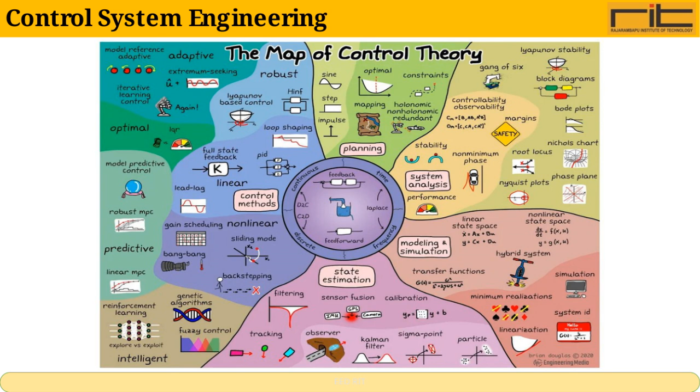On this slide, we're focusing on control system engineering, which is a crucial field in engineering that deals with designing and managing systems to behave in a desired manner. Essentially, control systems help us automate processes and maintain stability in various applications, from simple household appliances to complex industrial machinery. By understanding control system engineering, we can improve efficiency, accuracy, and safety across many technologies. This foundation will be important as we dive deeper into the principles and applications throughout the presentation.

By the end of this course, students will have achieved several important outcomes. First, they will be able to represent physical systems using mathematical models, which is fundamental for analyzing and designing control systems. They will also learn how to calculate time domain specifications for second-order systems, giving them insight into system performance like stability and response time. Additionally, students will be skilled in analyzing different systems through both time and frequency domain tools and techniques, enabling a comprehensive understanding of system behavior.

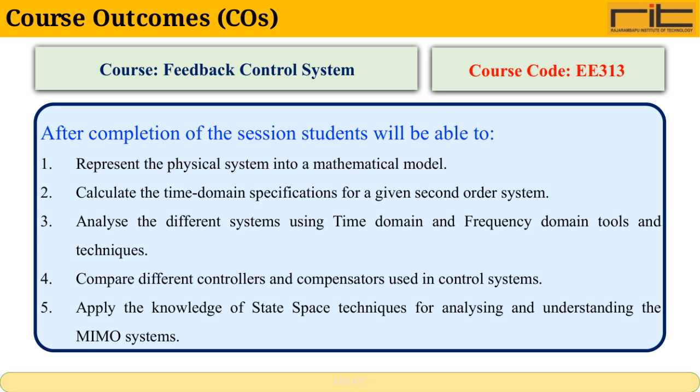In this topic, we dive into the concept of stability, which is crucial for understanding how systems behave over time. We'll explore how the location of poles and zeros in a system affects its stability, and introduce the Routh Hurwitz criterion as a method to determine stability systematically. Additionally, we'll use the root locus method to analyze gain margin, phase margin, and overall system stability through practical examples.

By the end of this topic, you'll be able to explain the time response characteristics of both first and second order systems. You'll learn how to determine the steady-state error for different system types and understand how this relates to overall system performance. We'll also cover how to compute key time domain specifications like rise time, settling time, peak time, and overshoot, which are essential for characterizing second-order systems.

Furthermore, you'll be equipped to evaluate how changes in system parameters affect the responses of both open-loop and closed-loop systems, helping you assess system sensitivity. Finally, we'll analyze the crucial role of feedback in influencing system stability, improving response, and enhancing disturbance rejection. This comprehensive understanding will give you a solid foundation to analyze and design stable, responsive control systems.

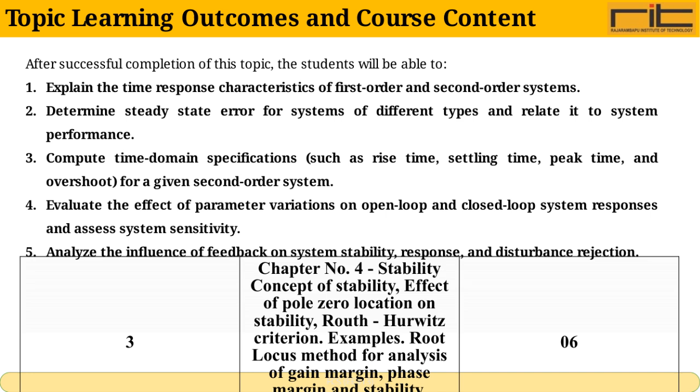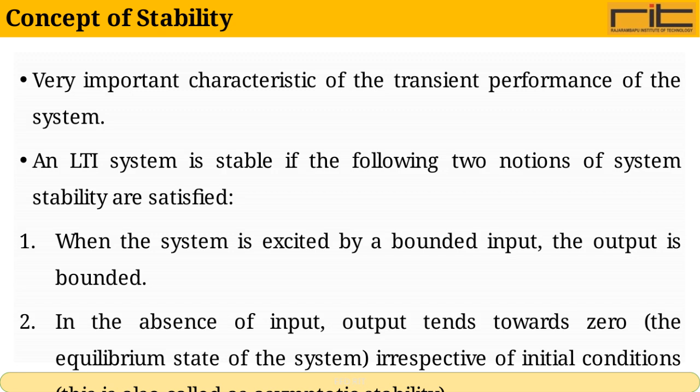When we talk about the concept of stability in an LTI system, it's crucial to understand two key ideas. First, the system is considered stable if, whenever it receives a bounded input, its output remains bounded as well. This means the system doesn't produce unbounded or runaway responses when given reasonable inputs. Second, in the absence of any input, the output should naturally settle down toward zero. This point is called the equilibrium state. This behavior, where the output returns to zero regardless of where it started, is known as asymptotic stability. Together, these conditions define what we call BIBO, or bounded input bounded output stability, which is a very important measure of how well the system performs in response to inputs over time.

When we talk about stability in a system, what we mean is whether the output remains controlled over time. Simply put, if the output stays within a certain range and doesn't spiral out of control, the system is considered stable. This is usually defined as producing a bounded output when given a bounded input. If the output goes beyond control, the system is labeled unstable.

Now, based on how systems behave in terms of stability, we can classify them into three categories. First, an absolutely stable system, which means it remains stable under all conditions. Then, we have conditionally stable systems, where the system's stability depends on certain parameters or conditions being met. Lastly, there are marginally stable systems, which are right on the edge, neither moving toward stability nor instability, often oscillating without growing unbounded.

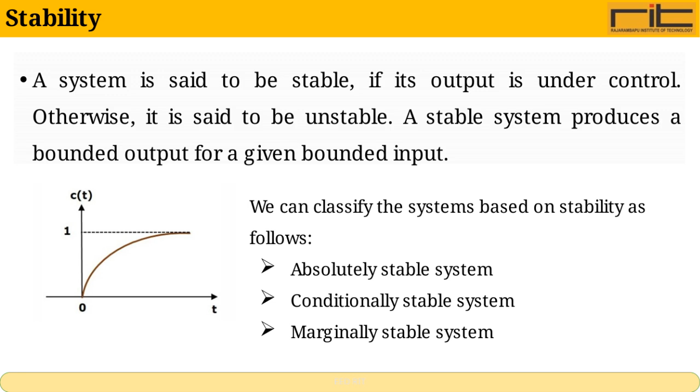Understanding these classifications helps us predict and control system behavior more effectively. When we talk about an absolutely stable system, we mean a system that remains stable for every possible value of its components. For an open-loop control system, this absolute stability occurs if all the poles of its transfer function are located in the left half of the S-plane.

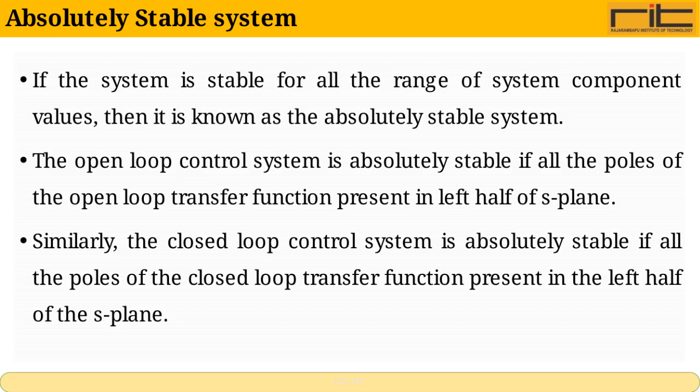This essentially means the system's response will not grow uncontrollably over time. The same principle applies to closed-loop control systems. Their absolute stability requires all poles of the closed-loop transfer function to also be in the left half of the S-plane. This ensures that the system will behave predictably and return to equilibrium after any disturbance, regardless of parameter variations. So, in essence, the position of these poles in the S-plane is a key indicator of absolute stability in any control system.

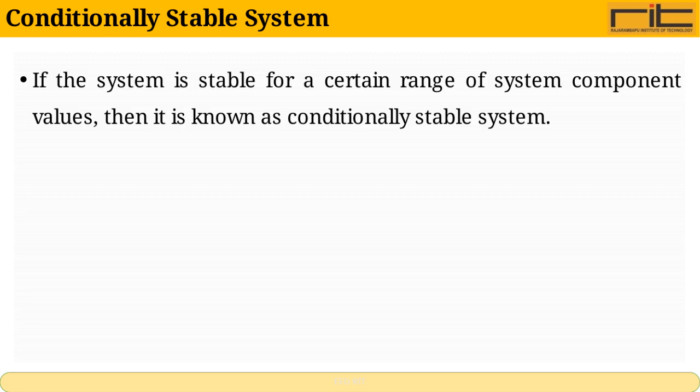A conditionally stable system is one that remains stable only within a specific range of its component values. In other words, the system's stability depends on certain parameters staying within particular limits. If these values change beyond that range, the system may become unstable. Understanding this concept is crucial because it helps us design systems that perform reliably under varied conditions, ensuring safety and functionality. So, when we talk about a conditionally stable system, we're acknowledging that stability isn't absolute but depends on maintaining the right conditions.

A marginally stable system is one that produces an output signal with a constant amplitude and constant frequency of oscillations when given a bounded input. This means the system neither diverges nor settles to zero, but continues to oscillate steadily. In terms of the system poles, for an open-loop control system to be marginally stable, at least two poles of its open-loop transfer function must lie exactly on the imaginary axis of the complex plane.

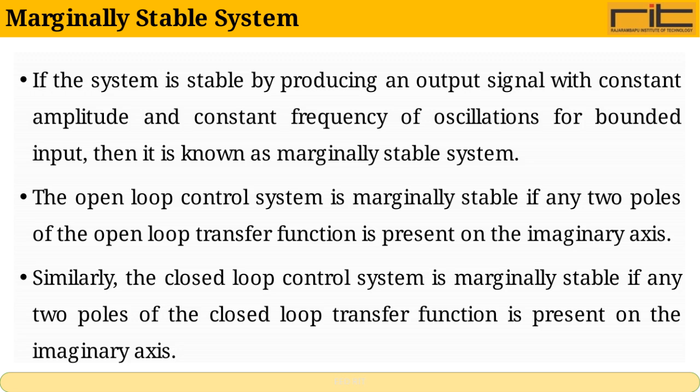Similarly, for a closed-loop control system, marginal stability occurs when two poles of its closed-loop transfer function are located on the imaginary axis. This positioning of poles indicates that the system is on the edge between stability and instability, where oscillations don't die out but also don't grow uncontrollably. Understanding this concept is crucial for analyzing system behavior and designing controls that avoid unwanted oscillations.

When we talk about stability in a system, it all comes down to the roots of the characteristic equation. If every root has a negative real part, the system is stable, meaning it will respond predictably and settle over time. On the other hand, if even one root has a positive real part or if there's a repeated root on the imaginary axis, what we call the jω axis, the system becomes unstable, which means it could grow unbounded or behave erratically. Then there's the case of marginal stability, where all roots have negative real parts except for one or more non-repeated roots exactly on the jω axis. Here, the system neither grows nor decays, but maintains a steady oscillation. Understanding these root conditions is crucial for predicting and controlling system behavior.

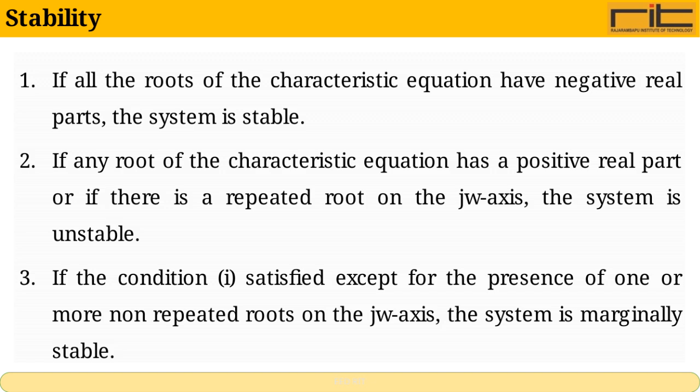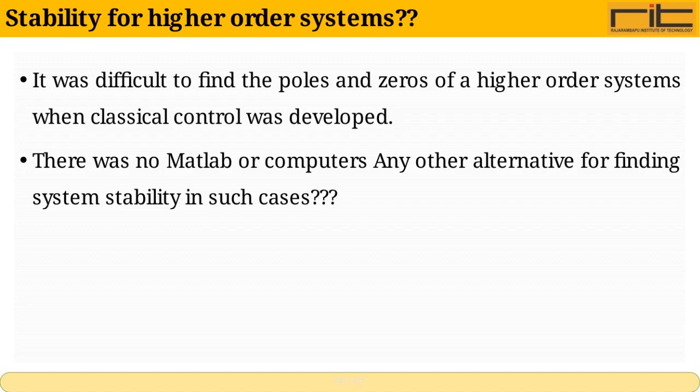When classical control methods were first developed, determining the poles and zeros of higher-order systems was quite challenging. This was mainly because there were no tools like MATLAB or other computer software to assist in these calculations. Without these tools, engineers had to rely on complex mathematical techniques, which could be time-consuming and prone to errors. So, the question arises, how did they check system stability under these circumstances? Was there an alternative method available to analyze stability without explicitly finding all poles and zeros? This sets the stage for exploring stability analysis techniques suited for higher-order systems, especially before the advent of modern computational tools. Let's talk about the Routh stability criterion.

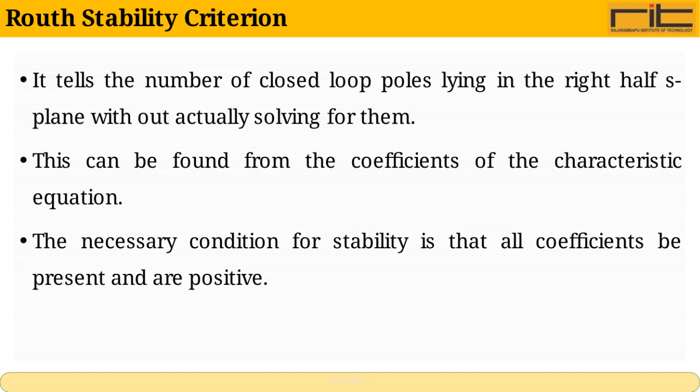This criterion allows us to determine the number of closed-loop poles that lie in the right half of the S-plane without having to solve for the poles explicitly. Essentially, it gives us a way to assess system stability by examining the characteristic equation's coefficients. A key point here is that for a system to be stable, all the coefficients of the characteristic equation must be present and must be positive. If any coefficients are 0 or negative, it indicates the presence of poles in the right half plane, which means the system is unstable. This method is particularly useful because it simplifies the stability analysis significantly.

The Routh-Hurwitz stability criterion involves two key conditions, a necessary condition and a sufficient condition for stability. First, the necessary condition must be met for the control system to even be considered stable. If this condition is not satisfied, we can confidently say that the system is unstable. However, meeting the necessary condition alone doesn't guarantee stability, it just means the system might be stable. This is where the sufficient condition comes into play.

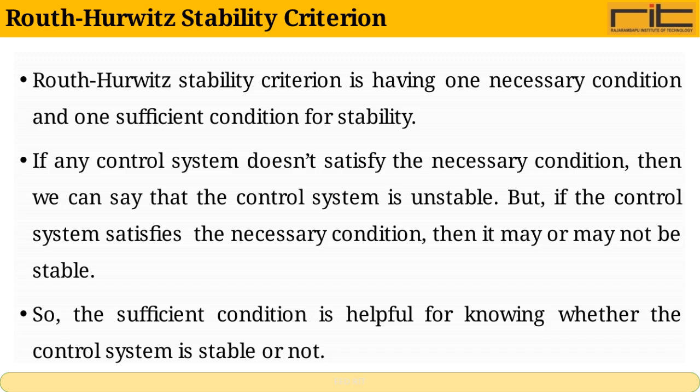It helps us determine definitively whether the control system is stable or not. So, to fully assess stability, both conditions play crucial roles, with the sufficient condition providing that final confirmation.

Now, let's discuss the necessary condition for Routh Hurwitz stability. For the system to be stable, a key requirement is that all the coefficients in the characteristic polynomial must be positive. This condition ensures that all the roots, or the poles, of the characteristic equation have negative real parts, which is crucial for system stability.

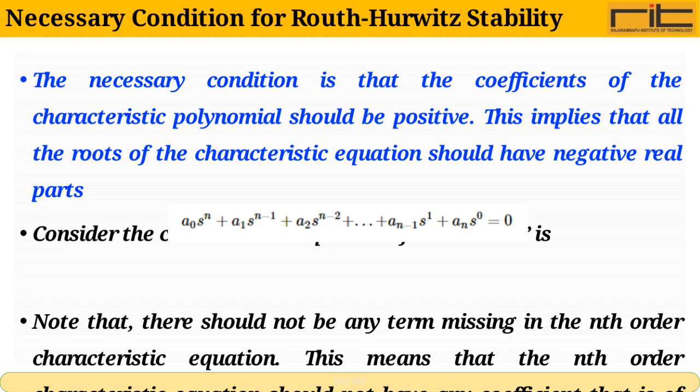It's important to remember that the characteristic equation should be of order n, and importantly, no term should be missing in this equation. That means none of the coefficients can be zero. If any coefficient is zero or negative, the system cannot be stable according to this condition. So, in summary, positivity of all coefficients in the characteristic polynomial is a necessary condition for the system to be stable, linking directly to the location of the roots in the left half of the complex plane.

Now let's focus on the sufficient condition for Routh Hurwitz stability. The key point here is that every element in the first column of the Routh array must have the same sign. In other words, all these elements should be either positive or all negative. This uniformity in sign indicates that the system is stable according to the Routh Hurwitz criterion. If the signs differ, the system will have poles in the right half of the complex plane, leading to instability. So, maintaining the same sign across the first column is essential for ensuring system stability.

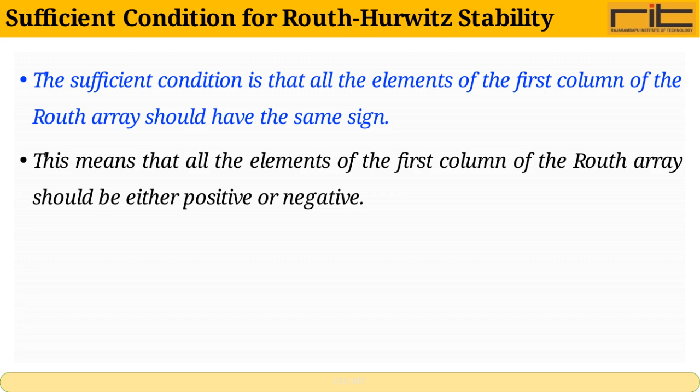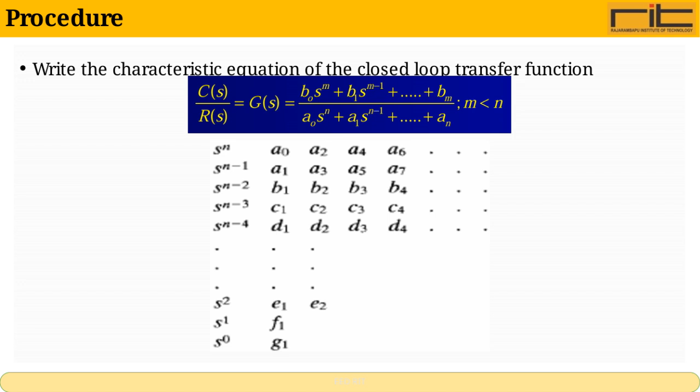Now, let's focus on an important step in analyzing control systems, writing the characteristic equation of the closed-loop transfer function. This equation is crucial because it helps us determine the stability and dynamic behavior of the system. Essentially, the characteristic equation comes from the denominator of the closed-loop transfer function when set equal to 0. By solving this equation, we can find the system poles, which tell us if the system will behave as desired or if it might become unstable. Understanding this procedure is key before moving forward with any design or analysis, so keep this in mind as we continue.

Now, let's focus on evaluating the b's in this procedure. It's important to note that these b's are different from those in the transfer function we might have seen earlier. We continue evaluating the b's until all the remaining values are 0, ensuring we've captured all necessary coefficients. The key method here is cross-multiplying the coefficients from the previous two rows to find the new b's. Once determined, we update the array with these new values.

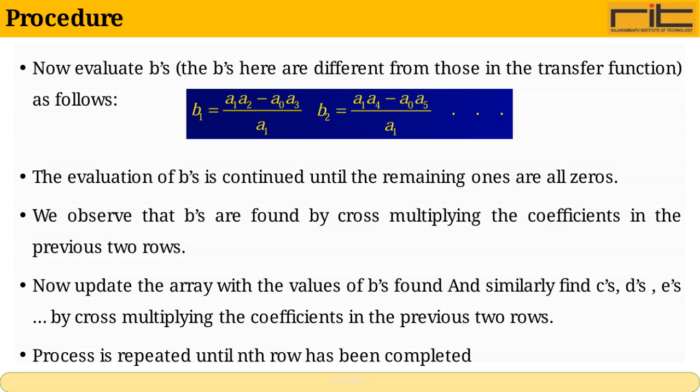We then use the same approach to find the next set of coefficients, the c's, d's, e's, and so on, always cross-multiplying the coefficients from the two preceding rows. This process is repeated systematically until the nth row of the array is fully completed. This step-by-step cross-multiplication and updating ensures that all necessary coefficients are accurately calculated for the analysis at hand.

Here, we're looking at an illustration of the procedure. This visual representation helps us understand the step-by-step process clearly. As we go through this, focus on how each step connects to the next, ensuring a smooth flow. The key takeaway is to grasp the sequence and how each part contributes to the overall operation. This understanding is crucial for applying the procedure effectively in practical scenarios.

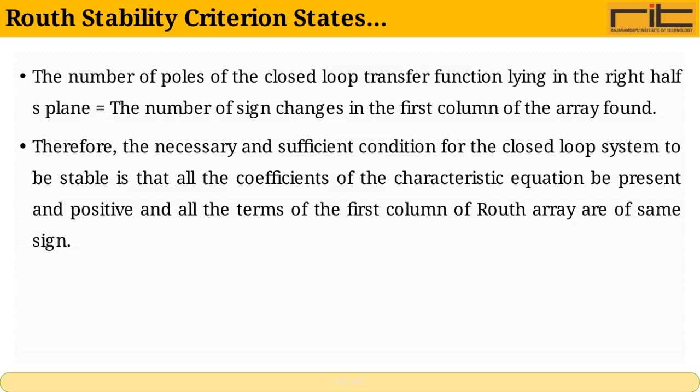The Routh stability criterion tells us that the number of poles of the closed-loop transfer function in the right half of the S-plane equals the number of sign changes in the first column of the Routh array. This is crucial because it directly indicates system stability. Simply put, for the closed-loop system to be stable, all coefficients of the characteristic equation must be present and positive. Additionally, every term in the first column of the Routh array must have the same sign. If this condition is satisfied, we can confidently say the system is stable. This criterion provides a straightforward way to assess stability without explicitly calculating the roots of the characteristic equation.

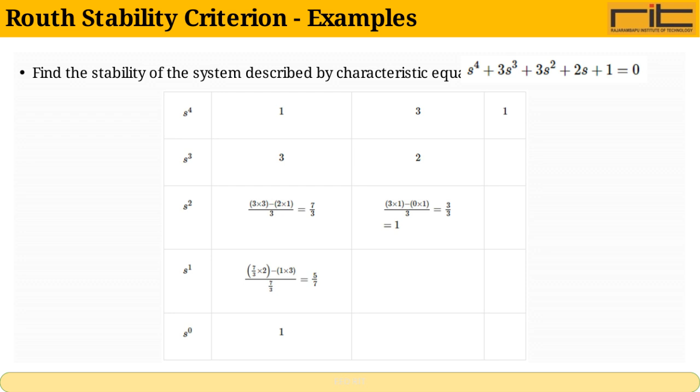On this slide, we're focusing on applying the Routh stability criterion to determine the stability of a system characterized by its characteristic equation. The key idea here is to use the Routh array, a systematic method that helps us examine the number of roots with positive real parts without actually solving for them. By constructing this array and analyzing the sign changes in the first column, we can quickly assess whether the system is stable. This example will walk us through that process step by step, illustrating how the criterion can provide a clear and efficient way to check system stability.

We'll walk through the process of constructing the Routh array and analyze the signs of the first column to conclude the system's stability. This approach is particularly useful because it allows us to assess stability without explicitly calculating the roots, saving time and effort especially for higher-order polynomials.

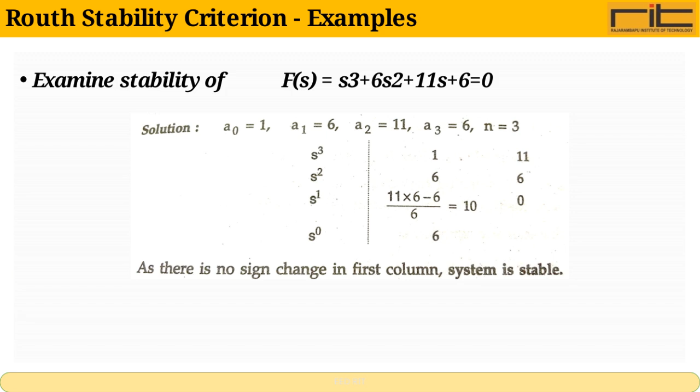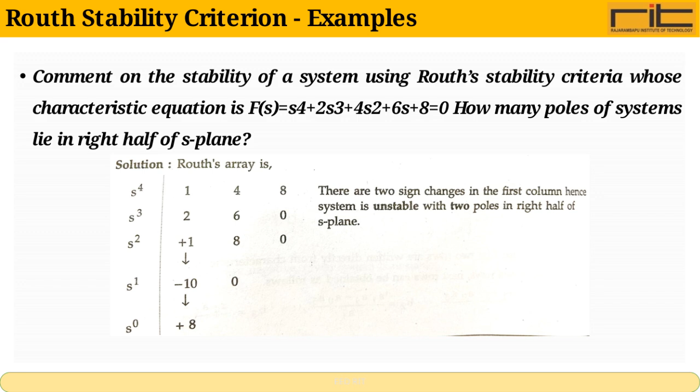Using Routh's criterion, we build the Routh array from the coefficients of the characteristic equation. If any sign changes occur in the first column of this array, it means there are poles in the right half-plane and the system is unstable. By carefully evaluating this equation, we check for the number of sign changes. This method provides a straightforward way to assess stability without explicitly solving for the roots, making it a powerful tool

for control system analysis. Now, let's talk about the two special cases that can occur when constructing the Routh array. The first special case happens when the very first element of any row in the Routh array is 0. This can create complications because we can't proceed with the usual calculations for the next row without adjusting for this 0 element.

The second special case occurs when all the elements in a particular row are 0. This situation indicates the presence of symmetrical roots or repeated roots, and it requires a different method to move forward in the stability analysis. Both of these cases need to be handled carefully to correctly determine the system's stability using

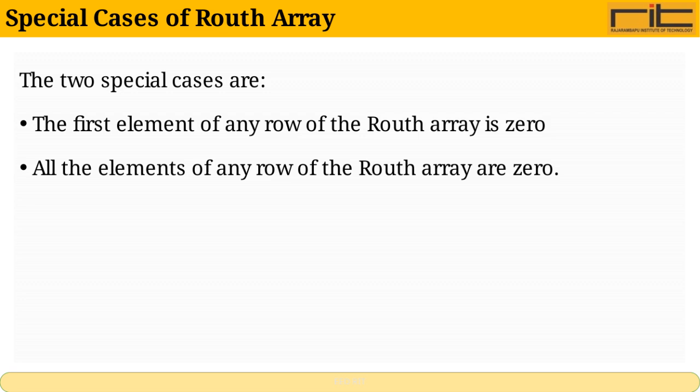the Routh criterion. Now let's take a closer look at some special cases that can arise when constructing the Routh array. These cases are important because they require us to adapt our standard procedure to correctly determine system stability. One common special case occurs when a row in the Routh array consists entirely of zeros, which indicates the presence of symmetric roots or repeated roots on the imaginary axis.

Another special case happens when the first element of a row is 0 but the row is not entirely 0. In this situation, we typically replace that 0 with a small positive number, often denoted as epsilon, to proceed with the analysis. Understanding how to handle these special cases is crucial for accurately assessing the stability of control systems using

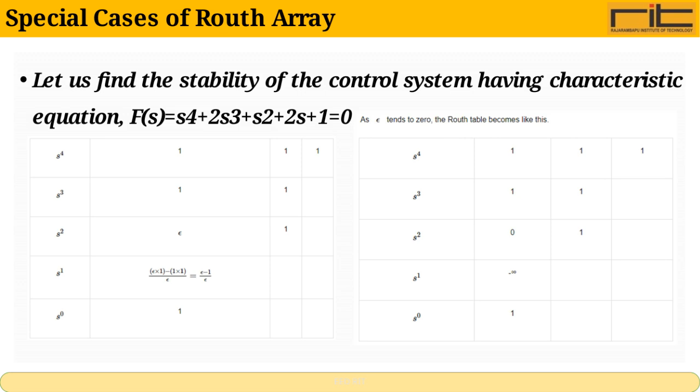Understanding these special cases in the Routh array is crucial because they help us identify scenarios where standard stability tests might fail or require additional steps, such as the presence of 0 entries in the array or special patterns that could indicate marginal stability. I'll guide you through how to approach these cases and ensure accurate stability analysis.

Identifying poles in the right half-plane is critical because it indicates system instability. In cases like this with higher-order polynomials, the Routh array helps us determine stability without explicitly calculating the roots. By constructing the Routh array and examining sign changes in the first column, we can find the number of roots with positive real parts, thus telling us how many poles are in the right half-plane. This approach saves time and provides essential insights into system behavior.

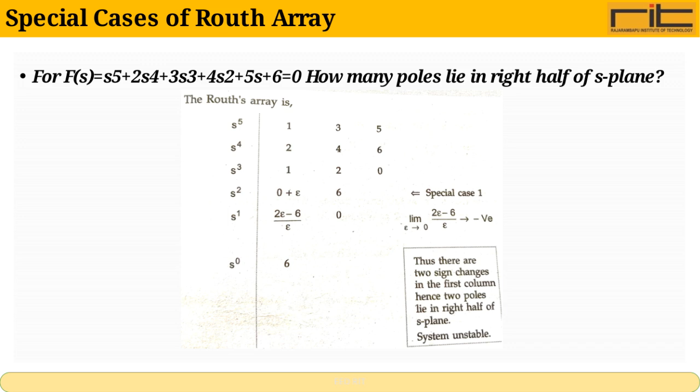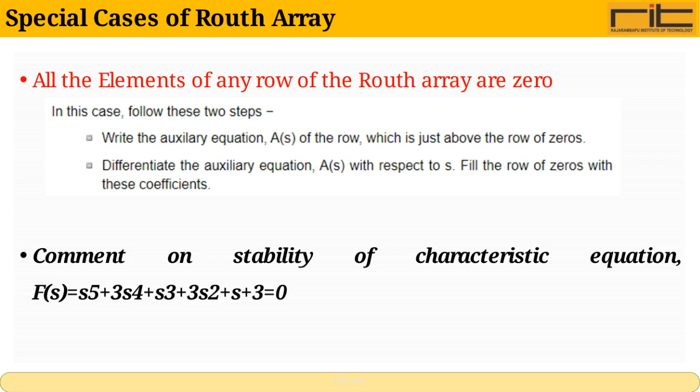In such a case, the standard Routh criterion doesn't directly apply, and additional methods, such as forming an auxiliary polynomial from the row above and examining its roots, are used to determine the stability of the system. This special case requires careful handling to accurately evaluate the system's behavior.

Here, we're looking at a special case in the Routh array where the characteristic equation is given as s to the fifth plus 3s to the fourth plus s cubed plus 3s squared plus s plus 3 equals 0. When we form the Routh array from this polynomial, we observe two sign changes in the first column.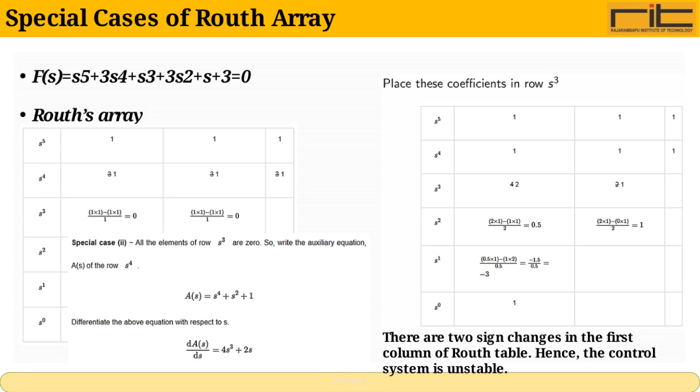This is a critical point because the number of sign changes tells us about the stability of the system. Specifically, two sign changes indicate that the system has two roots with positive real parts, meaning the system is unstable. So, despite the complexity of the equation, this sign change criterion gives us a straightforward way to assess stability quickly and effectively.

The stability of the system depends on the location of the roots of this polynomial in the complex plane. If all roots have negative real parts, the system is stable. Otherwise, it could be unstable or marginally stable.

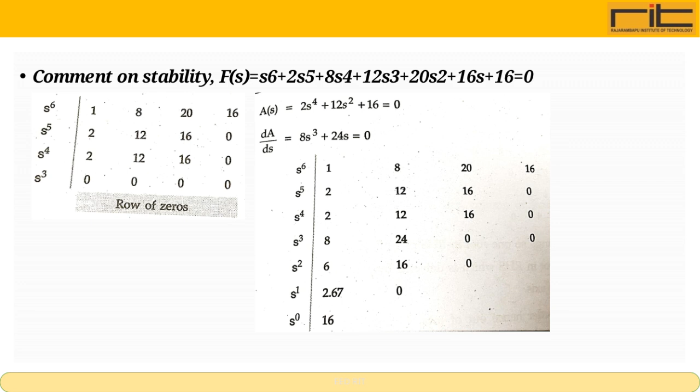Our goal is to comment on the stability by examining the coefficients and possibly applying methods like the Routh Hurwitz criterion or other stability tests to determine if any roots lie in the right half of the S-plane. This analysis is crucial because it tells us whether the system's response will settle down over time or grow uncontrollably.

Let's take a closer look at the stability of the system described by the characteristic equation F(s) equals s to the power of 6 plus 2s to the power of 5 plus 8s to the power of 4 plus 12s cubed plus 20s squared plus 16s plus 16 equals 0.

Stability in control systems depends on the location of the roots of this polynomial. For the system to be stable, all roots must lie in the left half of the complex plane, meaning they must have negative real parts. By analyzing the 6th-degree polynomial, we aim to determine whether this condition is satisfied.

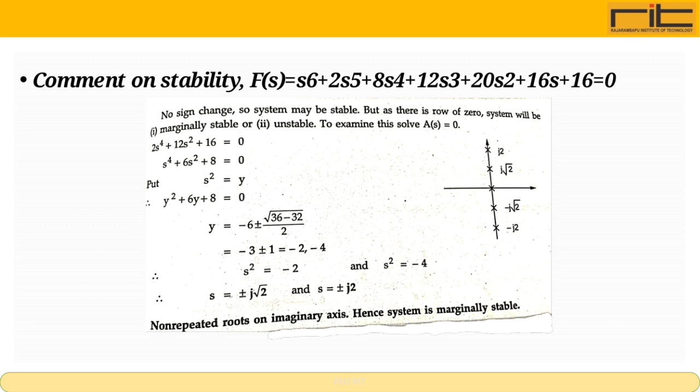Various methods, such as the Routh Hurwitz criterion, can be used to assess stability without explicitly finding the roots. It's important to look for any sign changes or patterns in the coefficients that could indicate poles in the right half plane, which would signal instability. So, the focus here is on understanding whether the system's behavior will remain steady over time or if it might oscillate or diverge due to unstable poles.

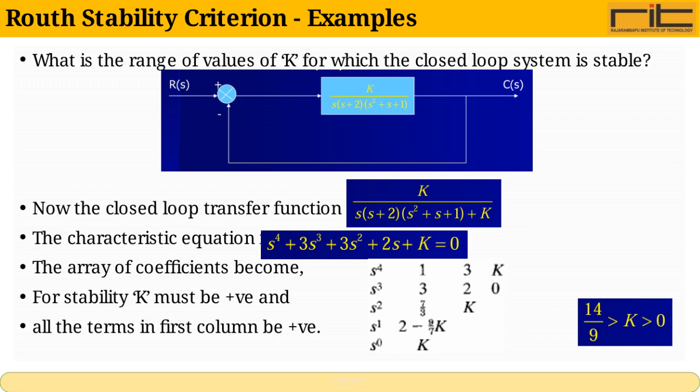The key point here is that for the system to be stable, k must be positive, and every element in the first column of the Routh array must also be positive. This ensures no sign changes occur, which would indicate poles in the right half of the complex plane and instability. By carefully examining these conditions, we can pinpoint the exact range of k values that maintain stability.

On this slide, we will look at some examples to better understand the Routh stability criterion. This criterion is a powerful tool used in control systems to determine the stability of a system without actually calculating the roots of the characteristic equation.

By constructing the Routh array, we can quickly assess whether any roots lie in the right half of the S-plane, which would indicate instability. Through these examples, I'll guide you step by step on how to form the Routh array and interpret the results, making it easier to apply this concept in practical scenarios.

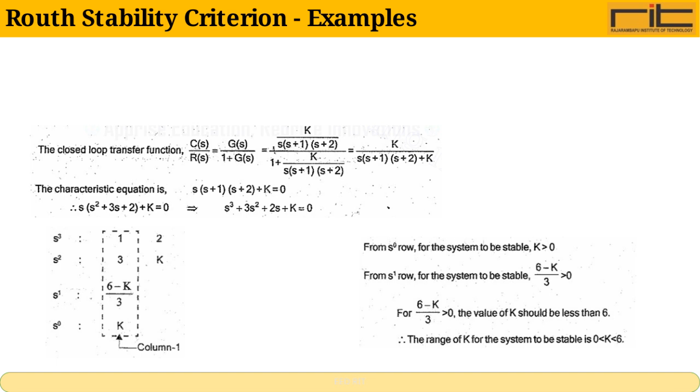Let's dive into these examples and solidify your understanding of the Routh stability criterion.

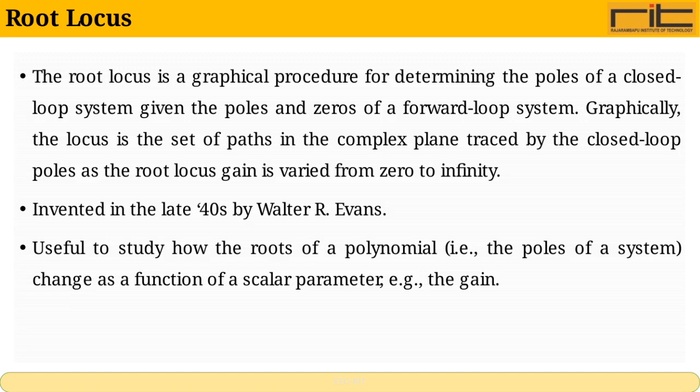The root locus is a graphical method used to find the poles of a closed-loop system based on the poles and zeros of its open-loop system. Essentially, it shows us how the system's closed-loop poles move in the complex plane as we adjust a gain parameter from 0 to infinity. This technique was developed in the late 1940s by Walter R. Evans. It's particularly helpful because it allows us to visualize how the roots of a system's characteristic polynomial evolve as we change a single scalar value, like the gain, helping us understand system stability and behavior more intuitively.

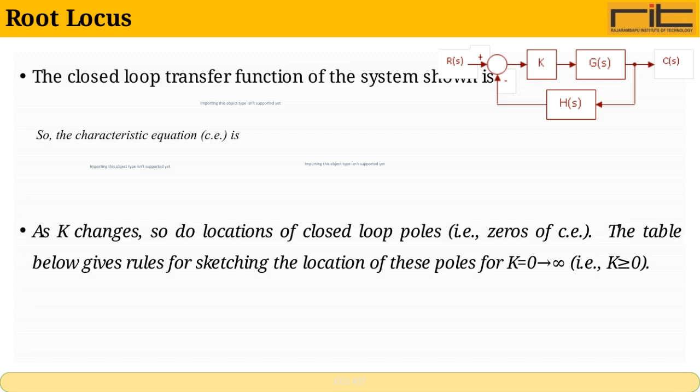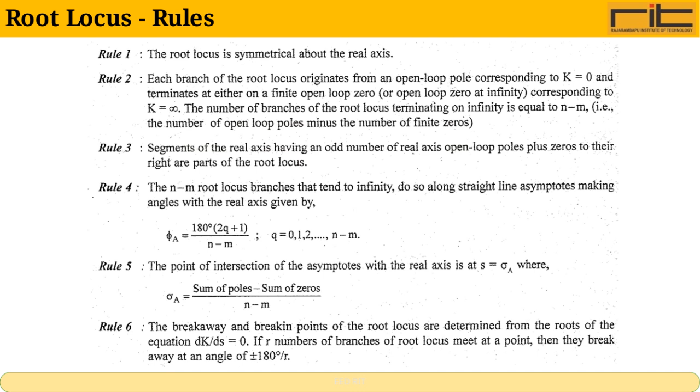Now let's delve into the rules of the root locus method, which is a powerful graphical tool used in control system design. The root locus helps us understand how the roots of a system's characteristic equation change as a particular parameter, commonly the gain, varies. By following specific rules, we can accurately sketch the root locus plot. These rules guide us on how to determine the starting and ending points of the loci, their paths on the complex plane, and where they intersect the real axis. Understanding these fundamentals allows us to predict system stability and transient response behavior as gain changes, enabling effective controller design. So, mastering the root locus rules is essential for anyone looking to analyze or design control systems with confidence.

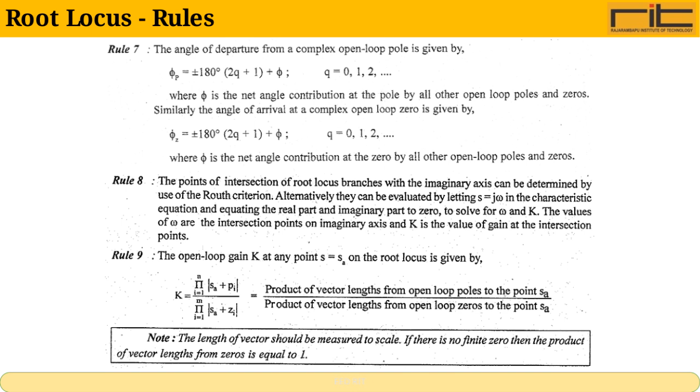Now let's talk about the key rules of root locus. These rules help us understand how the roots of a characteristic equation move in the complex plane as a particular system parameter, usually gain, changes. Root locus is a powerful graphical method in control system design, and by following these rules, we can predict system stability and performance. We will cover things like identifying starting and ending points of the loci, the behavior on the real axis, breakaway points, and asymptotes. Understanding these principles is crucial for effectively using root locus in analyzing and designing control systems.

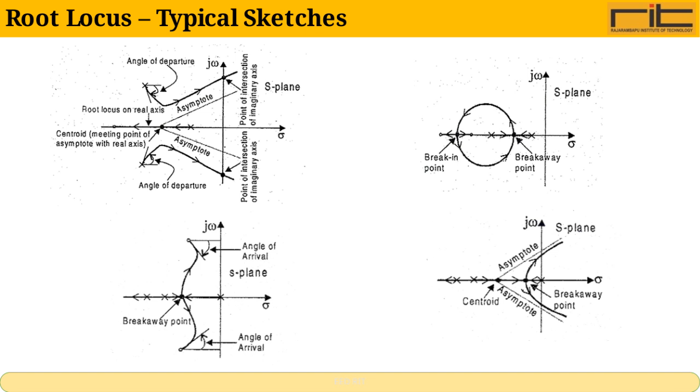Here, we'll take a closer look at typical sketches of root locus plots. These sketches help us visualize how the roots of a system change as we vary a particular parameter, usually the gain. Understanding these plots is crucial because they give us insight into system stability and transient response. By studying the shape and direction of the loci, we can predict how the poles move in the complex plane, which ultimately impacts the behavior of our control system. This foundational knowledge will be essential as we analyze more complex systems and their stability characteristics.

Here, we have a practical example of a root locus plot. The root locus is a powerful tool that helps us understand how the roots of a system change as a particular parameter, usually the gain, varies. By analyzing this plot, we can predict the stability of the system and how it will behave dynamically. This example will walk us through the steps of constructing the root locus and interpreting its key features, such as how the poles move, where they settle, and what that means for system performance. It's essential to grasp these concepts to design and tune control systems effectively.

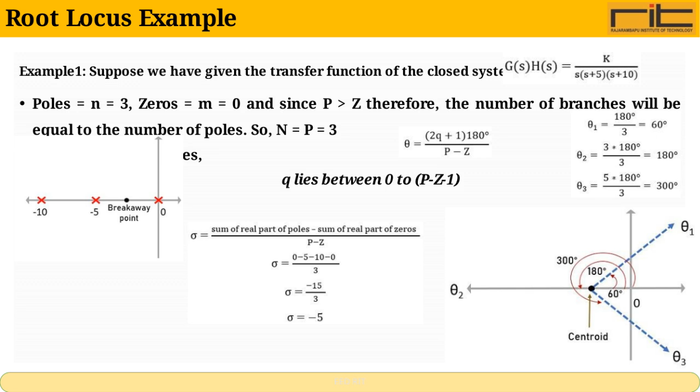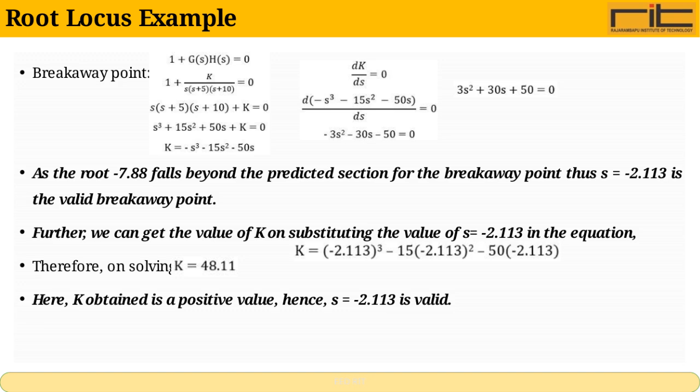Here, we are analyzing the breakaway point in the root locus plot. The value of the root at minus 7.88 falls outside the predicted section for the breakaway point, so it is invalid. Instead, the valid breakaway point is at s equals minus 2.113. To confirm this, we substitute s equals minus 2.113 into the characteristic equation and solve for k. The value of k we obtain is positive, which means this root is indeed valid. This positive k indicates the system's gain at which the root locus breaks away from the real axis, helping us understand the stability and behavior of the system as the gain changes.

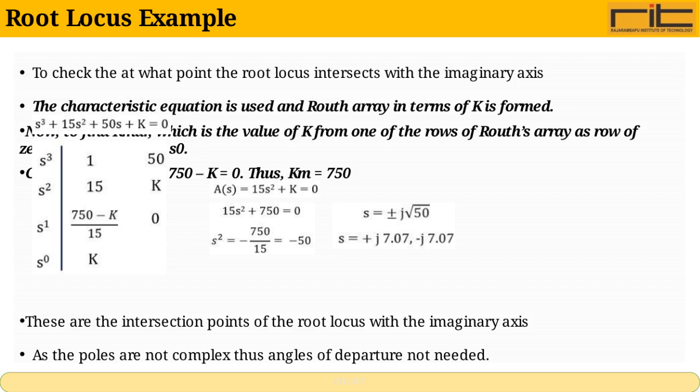Since the poles in this example are not complex, we don't need to consider angles of departure. So, the key takeaway is that by using the characteristic equation and Routh array, we can pinpoint the exact gain value where the system transitions, helping us analyze stability effectively.

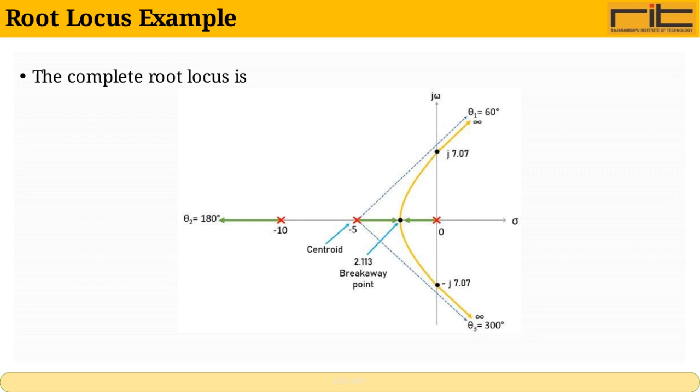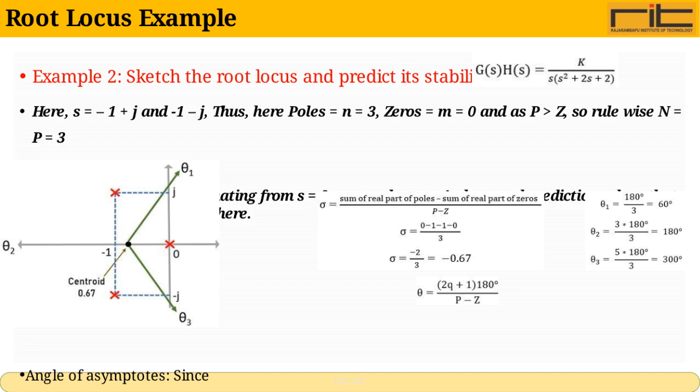To analyze further, we look at the centroid, which gives the center point where the asymptotes intersect on the real axis, and the angle of asymptotes, which indicates the directions these branches take as they move toward infinity. Understanding these components helps us predict how the system poles move with varying gain and ultimately assess stability. Here, since the branches move leftward and no poles cross into the right half plane, the system tends to be

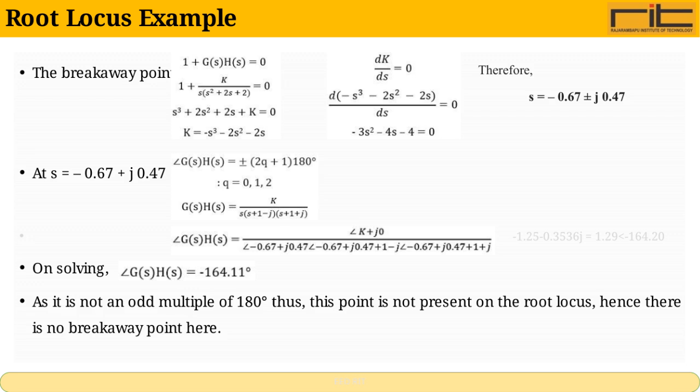stable under these conditions. Here we are examining the breakaway point on the root locus. The candidate point is at s equals -0.67 plus or minus j 0.47. When we substitute this value into our characteristic equation, we find the angle is approximately -164.20 degrees, which is not an odd multiple of 180 degrees. This means that this particular point does not lie on the root locus, and therefore, it is not a valid breakaway point. So, the conclusion here is that s equals -0.67 plus or minus j 0.47 is not where the root locus branches diverge. This helps us refine our understanding of the system's stability and behavior.

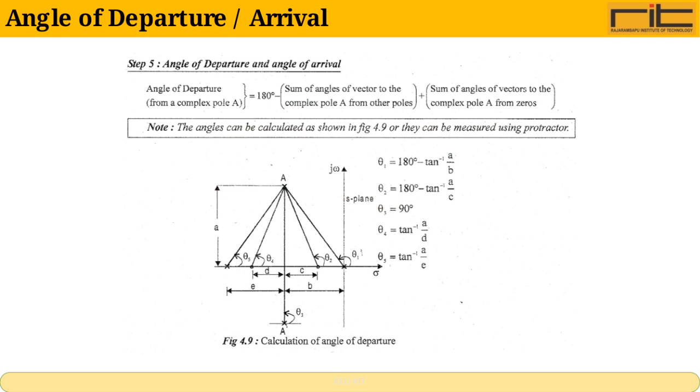Here, we are looking at an important aspect of root locus analysis, the point where the root locus intersects the imaginary axis. This occurs when one of the roots, S1 in this case, is equal to 0. Specifically, when the gain Km is set to +4, S1 reaches 0. By substituting Km equals 4 into our characteristic equation, we can analyze the system behavior at this critical point. Understanding this intersection helps us determine system stability and the range of gains for which the system remains stable. This is a key concept in control theory as it allows us to fine-tune the controller gain to achieve desired

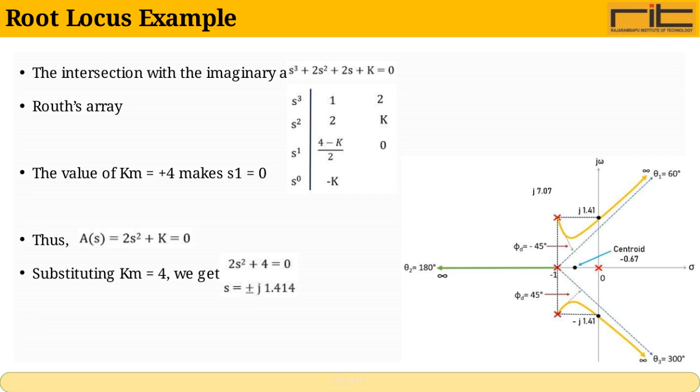performance without compromising stability. Here we have a root locus example, which is a powerful tool for analyzing and designing control systems. The root locus helps us understand how the poles of a system move in the complex plane as we vary a particular parameter, usually the gain. This movement directly affects the stability and response of the system. By studying the root locus, we can predict how changes in gain will influence system behavior and make informed decisions to ensure desired performance. It's essential to grasp this concept because it forms the basis for tuning controllers and achieving

stable, efficient control systems. Now, let's talk about how to determine the value of k at any point on the root locus. There are two main ways to do this. First, we have the magnitude criterion. At any point on the root locus, the magnitude of the open-loop transfer function equals 1 over k. By applying this formula, we can calculate the specific value of k at that desired point. This method relies on analyzing the magnitude of the system response at a particular location on the plot.

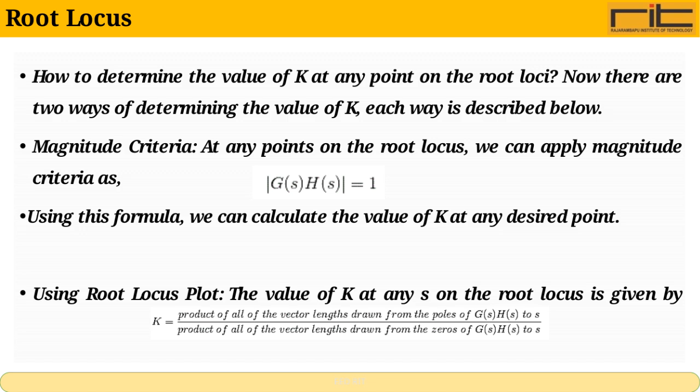Second, we can use the root locus plot itself. The plot visually represents how the roots move as k changes, so by locating the point S on the root locus, we can directly determine the corresponding k value from the graph. This approach provides a quick visual understanding of the system's behavior for different gain values. Both methods are effective, and choosing between them depends on whether you prefer a formula-based calculation or a graphical estimation. Understanding these allows us to control system stability and performance by selecting the right gain, k.

On this slide, we're looking at two important stability measures in control systems, gain margin and phase margin. Gain margin tells us how much we can increase the system's gain before it actually becomes unstable. It's a way to quantify how robust our system is to changes in gain. Mathematically, it's expressed as the factor by which the gain can be multiplied before the system loses stability. Phase margin, on the other hand, measures the additional phase lag required to bring the system right to the edge of instability. It's often calculated from the phase of the system at the frequency where the gain crosses unity. Both these margins give us essential insight into the system's stability and its tolerance to variations, making them critical in

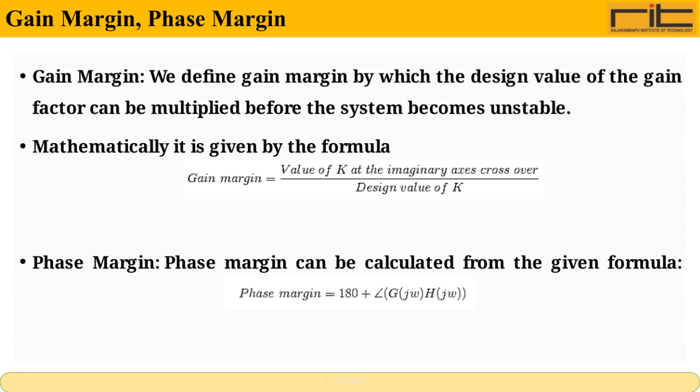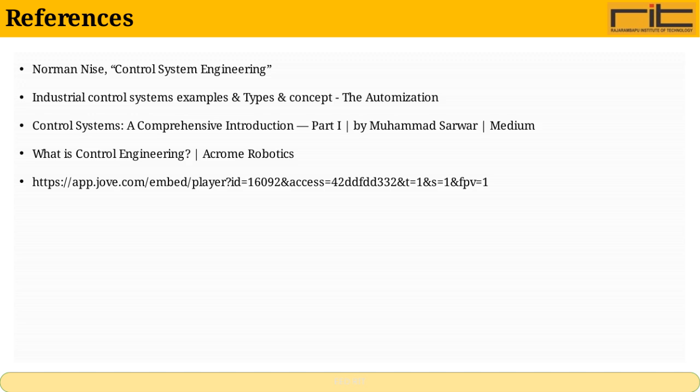system design and analysis. Here are the key references that have informed this presentation. First, we have Norman Nise's book, Control Systems Engineering, which is a foundational text in understanding industrial control systems. Next, the article, Industrial Control Systems: Examples, Types, and Concepts. The Automization provides practical insights into different types of control systems and their applications in industry. Muhammad Sarwar's comprehensive introduction on Medium offers a clear overview of control systems concepts, which is very helpful for grasping the basics. Additionally, Acrome Robotics presents an accessible explanation of what control engineering entails. Finally, the JoVE article included as a video resource supplements this information with visual demonstrations. These references together give a well-rounded foundation on control system engineering.